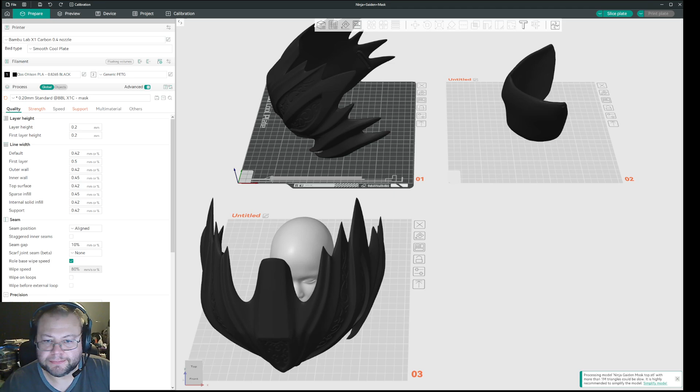So this is a Ninja Gaiden mask that was on some site, but I had some problems with the support structures here.

So yeah, if you look at this mask here, I used the standard profile that came with it. I don't think I tweaked it so much. And if you look at support, these are more or less, let's see, I can return those settings to the default ones that they were.

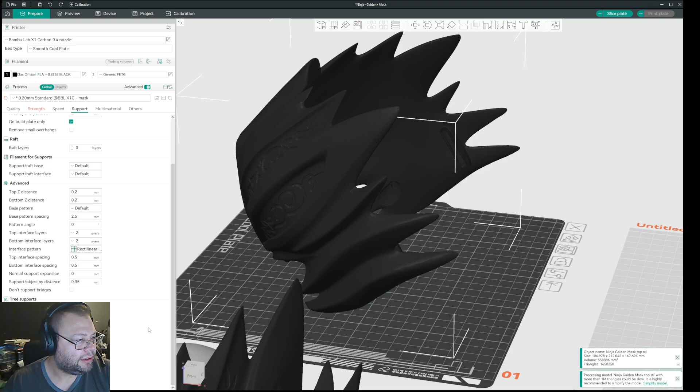There. I'll just slice it.

So I was hoping there was a setting for this, like you could use. I'll explain all of the things I was thinking about here. It is a massive model with over 1 million polygons.

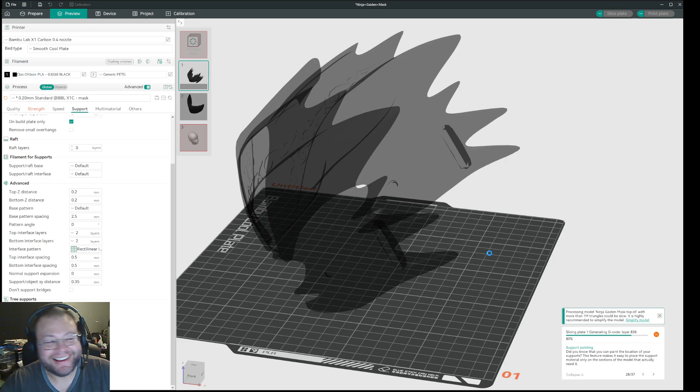Anyway, the problem I have, you can see some of the supports are pretty okay. They have a top Z distance. But then you have some of these supports, like here and here. No matter what I do, it always remains the same.

So I'll just start with changing the top Z distance to, let's say, 0 for that, and 0.28 for that. 0.28 should be okay. Remove the bottom layers, don't need them. When we slice it again, it should look pretty similar.

Now, the reason I thought it was the top Z distance is because that usually is the distance from the support to the object itself. I was thinking, okay, maybe that is it.

And then you have the bottom Z distance, which is for supports on the bottom. Like if you have something inside a hole, and you want to support top and bottom, but you want to print inside the hole. I think that's what that's for.

And then you have top interface layers. Those are the actual, like if you want to print with PETG for easy removal, you would set those to be PETG while you print the rest as PLA.

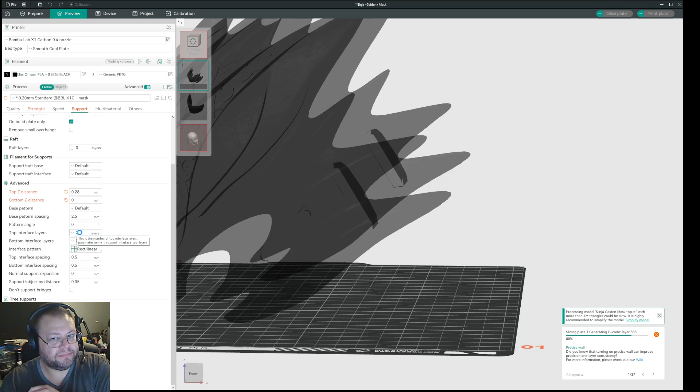I have had a case before where I had to increase the number of layers to get the supports to reach them. But I tried to change that and it didn't change anything.

I also tried, I was thinking maybe top interface spacing, since the interface layer itself has a spacing, and I was just thinking out of the box, like what if the interface spacing was too wide and that caused the interface to not have enough surface to stick on or something.

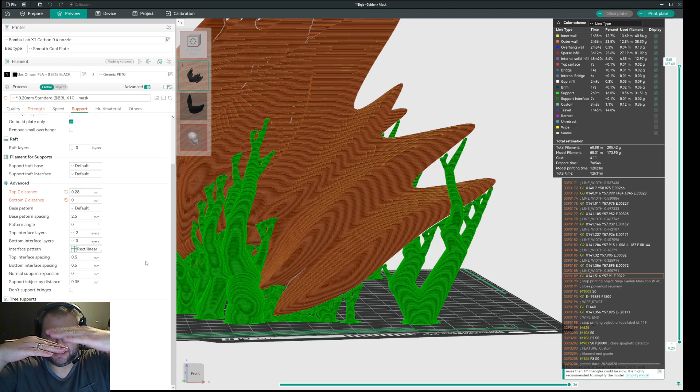But I tried to set that to even down to 0. It didn't help. And for this model, when you want to remove the supports, you should have interface spacing so that it breaks off, because that combined with the top Z distance will be like, instead of squashing the plastic together, it will barely touch it, so when you click it off, it just easily comes off.

I also thought it could be the support XY distance, because if you think you have the model down here, then you would have a certain distance from where your support is to where your object is. And I was thinking, okay, what if that is also the same in height? Maybe that is what is sort of causing it to not reach the object itself.

But I tested that and it wasn't that either. I haven't tested raft layers. I don't think that matters at all.

Raft contact Z distance. What is that? Let's set that to 0.5 and see. I haven't tested that one. I would be surprised if that even had anything to do with this, because raft is usually something that it's laying on top.

Oh, sorry, it's been a long day. I'm just trying to slice it.

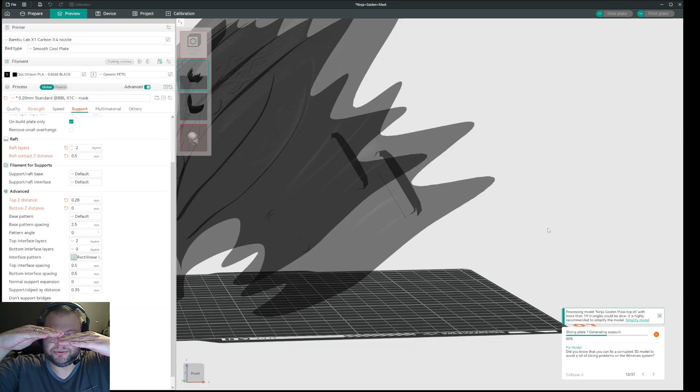I think the Z distance here is actually the distance from the object to the raft itself. I'm not sure though, but I think that is it, so I don't think it will matter on this.

In case you're wondering, I did find one way to combat this problem. I'll get to that. I just want to see if this helped.

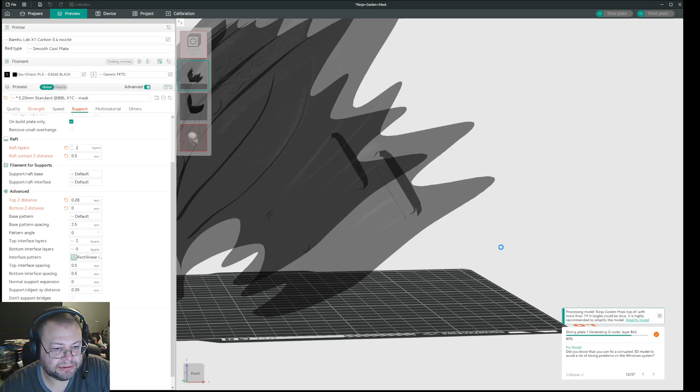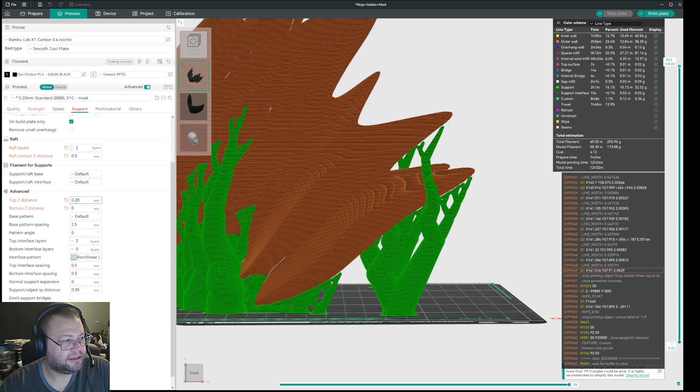No, I did not. You can see there is still a bit of a gap here. And you can also see that the other model, like this one here, it also has a bit of a gap, which means that the top Z distance to the support is kind of big. So I'll try and reduce that to 0.15. Let's see if we get contact.

I'm printing with a layer height of 0.2. So if you print with a top Z distance of 0.15, then it should only squash into the plastic about 0.05 millimeters, which makes it easy to remove.

You have to remember you need to have a certain bit of contact, otherwise the supports are not going to function. But you have to think of it like an arch, as far as I've understood. So if the nozzle is printing and you have the bottom of the half circle of the print, if the top Z is too low, the surface is flat. If it's too high, it will barely touch at the edge of the circle on the supports.

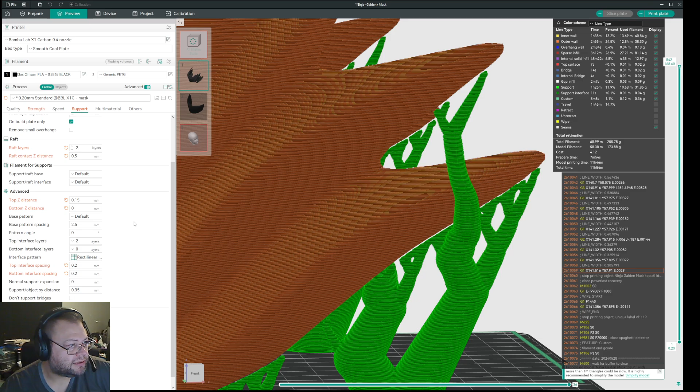Normally I only take like 15 millimeters on the spacing for the supports, but these are tree supports, so I usually print with the normal square ones.

If I make you all yawn this session, then I have accomplished something.

Yeah, wish I had a faster computer. A 9900K doesn't cut it anymore.

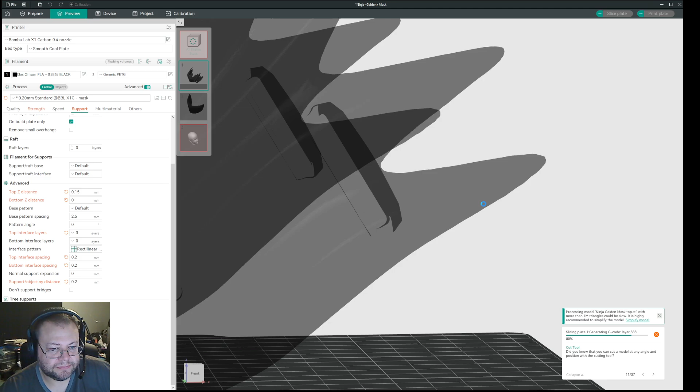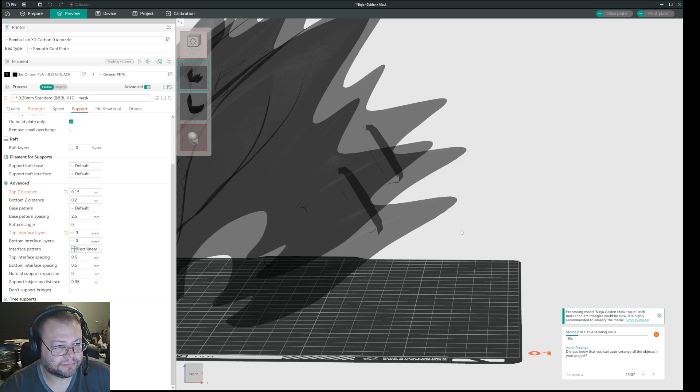That looked even worse, that looked even worse. That was weird. I'll slice it there and we'll see. Now I reset the settings back. It could be that you need more supports, but I really don't think so.

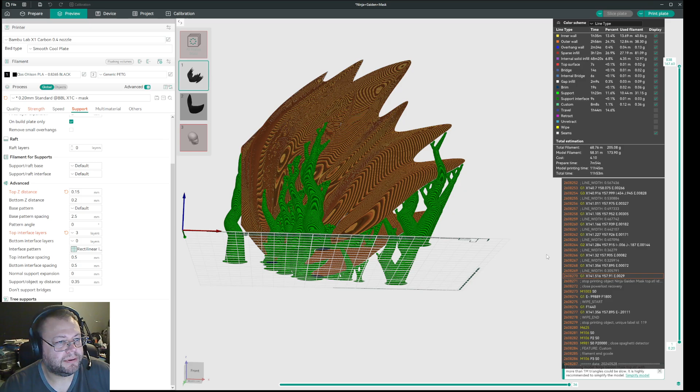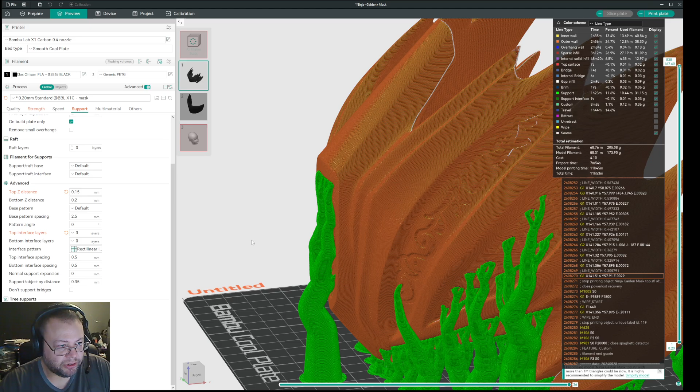Because it was looking pretty much like what it did. Now what you can see here, I'm just gonna try and explain it again. You can see the edge here, it's kind of sharp, which means that the supports that have been painted there are not so big, and that is more or less what I found out to be the main reason why these supports don't appear to be reaching the top. Now the gap looks kind of big, but it's not that big, but it could be more than what is tolerable for printing, so it might not actually support.

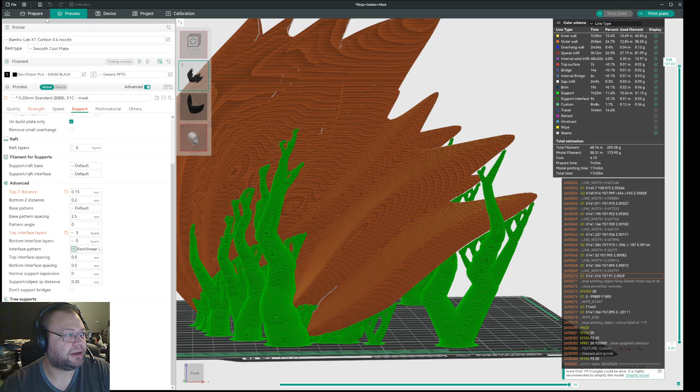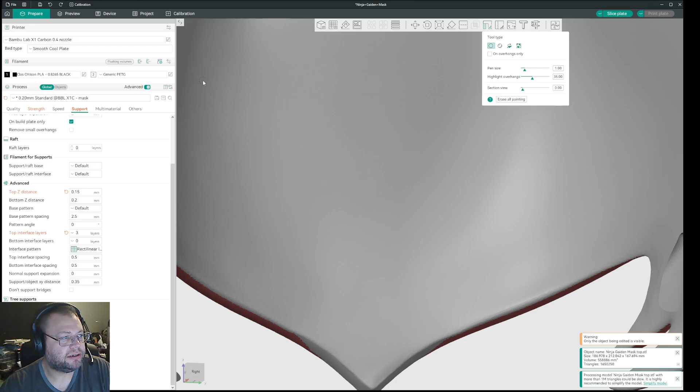So what I did was I went out in prepare view. That's the wrong one. So I go into this, and then I open this, and then I just did it. You can see here you already have some supports, but it's like barely any markings on it. If I drag it down, that's probably not even showing that it's being supported. So what I did is I increased the overhang detection setting here.

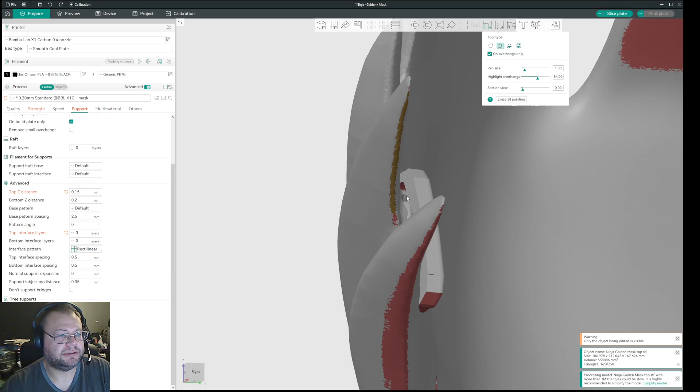Overhang detection like that, and then I used that. You can either fill it, but it's just the same if you use this. Then you just go in and you use the tool there to basically draw the edges. So I'm gonna do it here as well, just a little bit. I want a bit bigger.

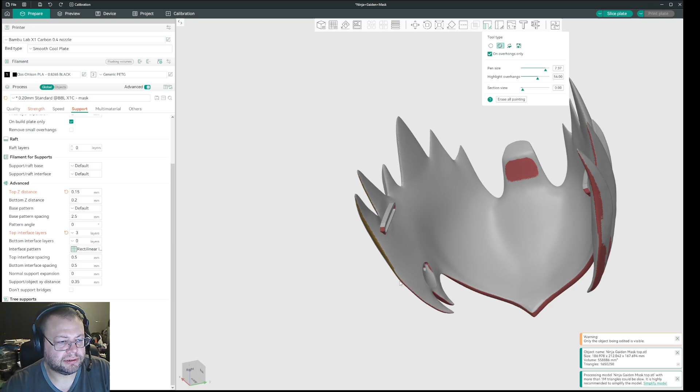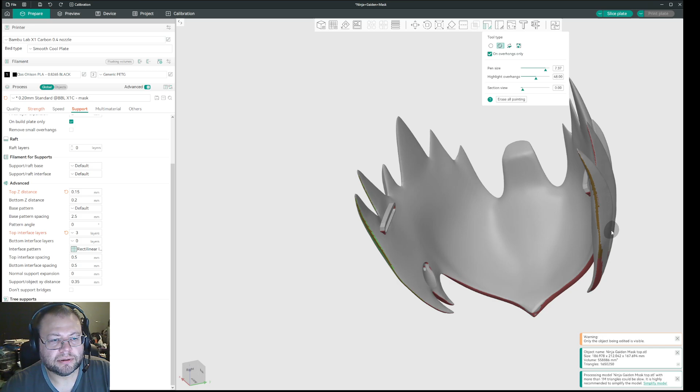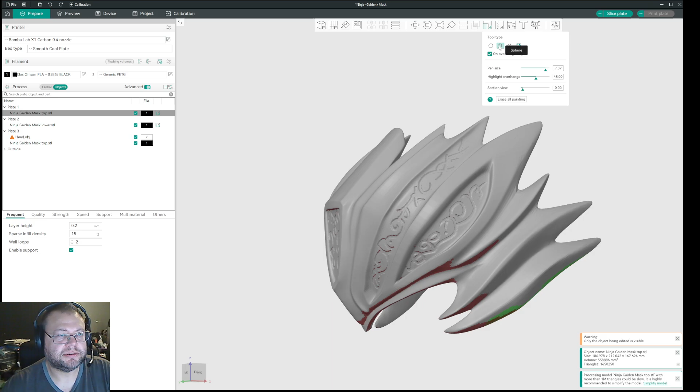I'm gonna reduce the overhang there a little bit. And then on the other side I'll do the same. So hopefully now when I go back out, it should manage to slice that properly.

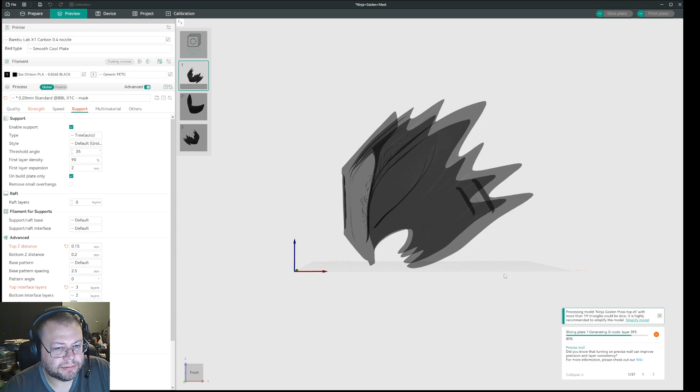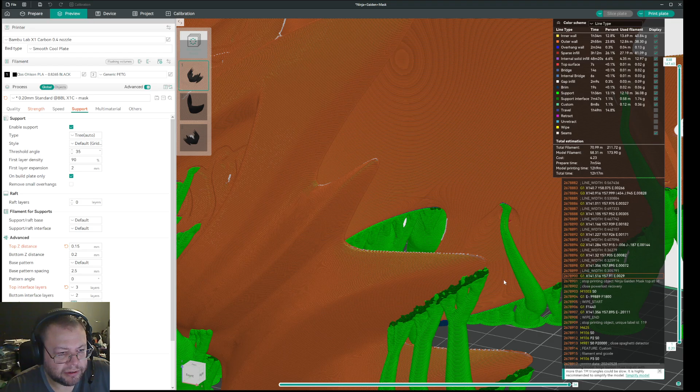There you can see. Now it's also showing the dark green is the interface layers, and you can also see that it is literally touching the supports. I'm gonna reduce it to 2, and I'm not gonna use bottom layers. It's easy when you don't need to use so many interface layers, it is easier to make it to break it off.

Let's see how it looks like now when I have removed 2 of the interface layers and have the newly painted supports.

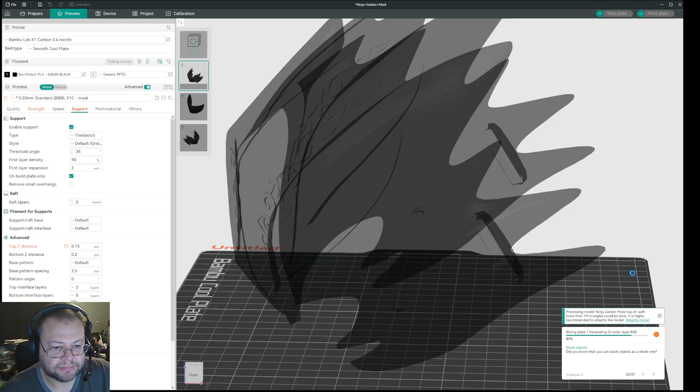There. That does look better. I am gonna try and increase the distance a little bit to try and make it easier to tear off.

This leads me to one of the other things I wanted to show you about the supports. There's a lot of better videos than mine that handle tree supports and easier break off and like that. So this is just what I'm thinking about it, it's not necessarily what's correct.

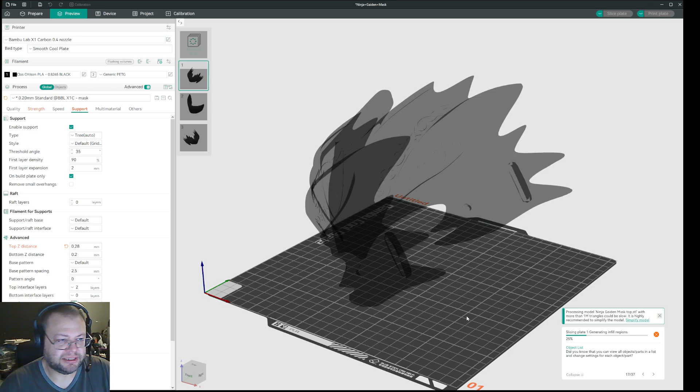So yeah, if anyone knows how to fix that gap between the supports without having to repaint, even if you have small supported sections, feel free to let me know what setting I have to change, because that would be nice. Then I don't have to paint so much, because I like to paint as few supports as possible to be able to print the model, for less post work.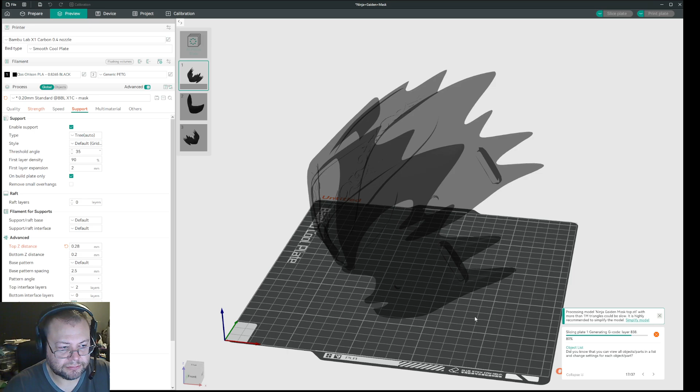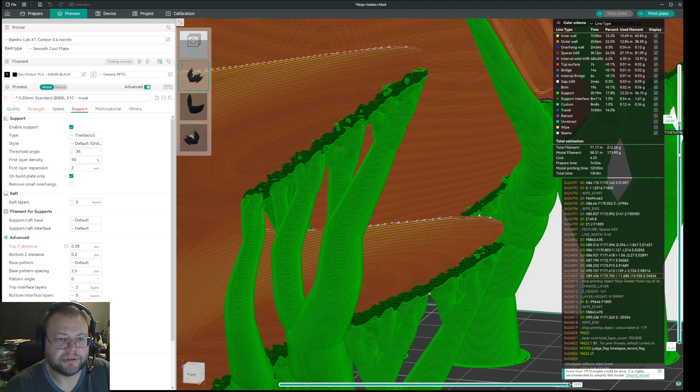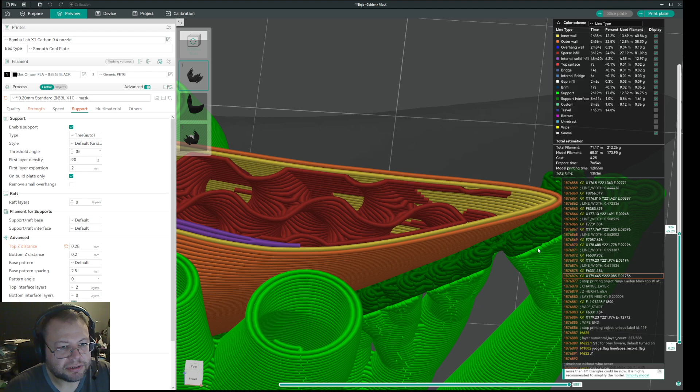Okay. And you can tell that it is. I'm just gonna try and bring it down a bit in the view. So let's see. It's not so easy to see how much space is really there, but you can say that this is like the outer one and this is the inner one. You can tell that there's a space here. Let's see if I can bring it down a little bit more. Leave it at 0.2, which was the original one.

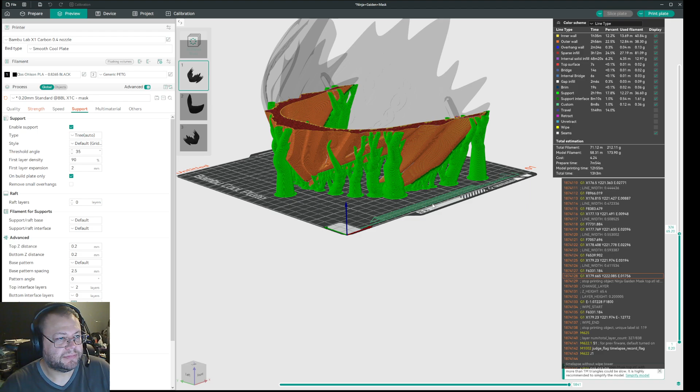I do think I'm happy with these supports. It is set to print as hollow. I think I'll increase the, how many layers is the? Isn't there a space where you can set how many walls you want on your supports?